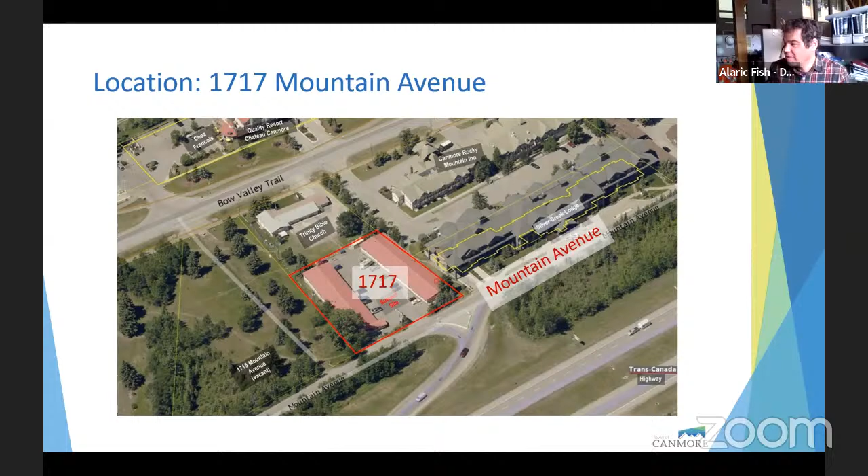So looking at the site from that access ramp, looking southwest, the existing building is partially obscured by the trees there, but you can also see it to the left. So that was the Akai Motel. It was a visitor accommodation and it's currently closed down. The existing building, while it complied with the use as visitor accommodation, it didn't meet the current density minimums and is subject for redevelopment here with this application.

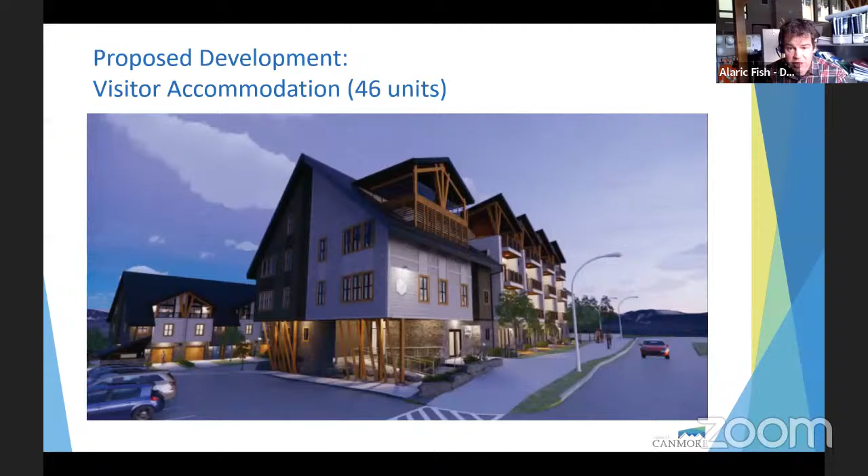So this is the applicant's rendering looking northwest from Mountain Avenue, in the general direction towards Banff, looking down the valley there. The development proposes 2 buildings with a total of 46 units of visitor accommodation. You can see the taller east building in the foreground of this image and the lower west building in the background, just behind the main access road. Also clear in this image is the new mixed-use pathway in front of the building, which provides significant new opportunities for pedestrians and cyclists in the area. This is important as there's currently no sidewalk in front of this property.

So this is a rendering from the other side, looking south from Mountain Avenue, showing the property as you would approach it from the north. This illustrates how the application largely conforms with the land use bylaw regulations.

The building form, materials, colors, and detailing all generally align with the community architectural and urban design standards. You can see the stone base, some articulation in the building, and the steeply pitched roofs. The 7-meter eave line is also achieved, and you can see how the top floors above that eave line step back, which helps reduce the massing as we view the building from the public realm.

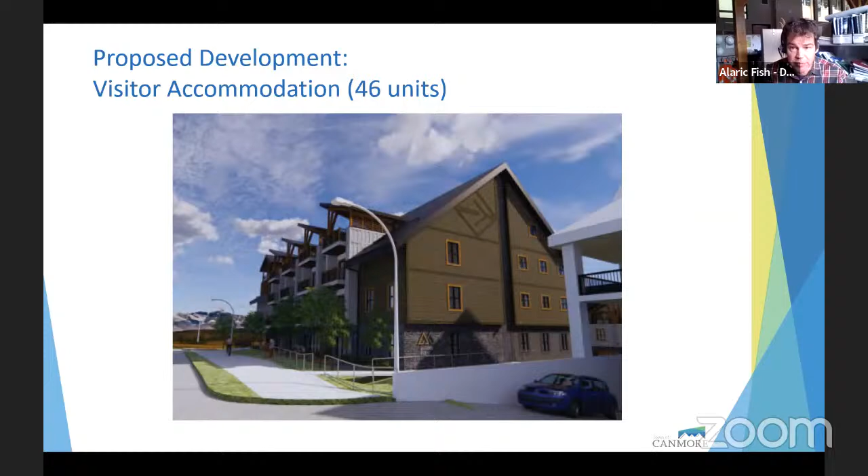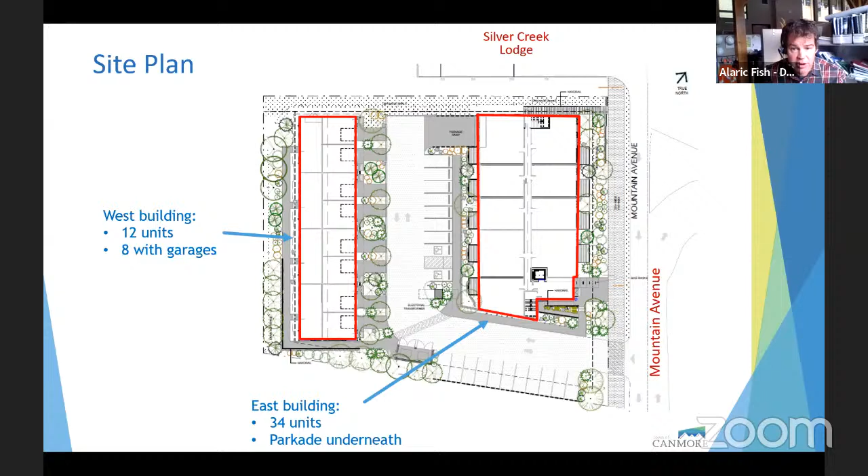Parking is provided in a variety of forms. You can see 20 surface stalls between the 2 buildings, and under the east building is a parkade with 18 stalls. On the west building, there are also 8 garage stalls. So the parking requirement has been met.

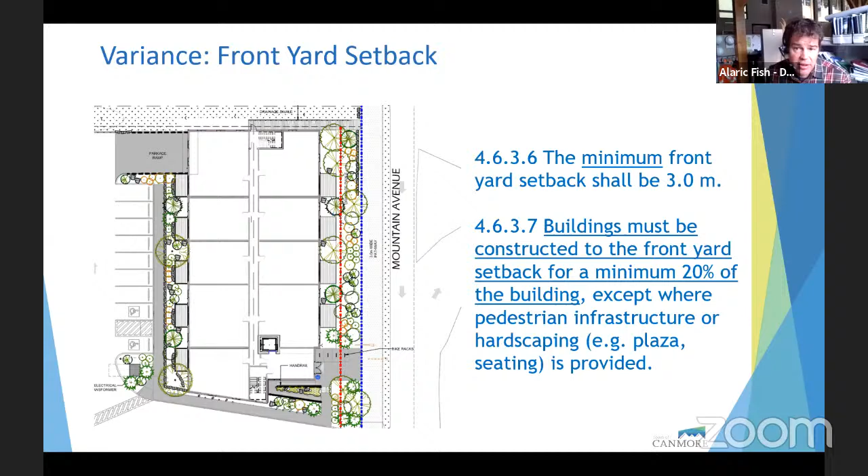I just wanted to point out that clause 114.16 establishes that as a condition for a variance, the development must meet the Town of Canmore enhanced green construction requirements. To meet this, the applicant has suggested they will achieve an improvement of 10% better than the National Energy Code of Canada for Buildings reference building. That commitment has been captured as one of the proposed conditions of approval, number 6, attached to the report. So the applicant has met that requirement.

There are a few other minor details that are proposed to be resolved through the conditions of approval.

The main condition is that a final plot plan reflecting the small changes in the building location be submitted prior to release of the development permit. An initial plot plan was submitted, but there were some small changes, so we just want to clarify that, though it doesn't change the intent of the application as presented.

Other fairly standard conditions include clarity on fire smart landscaping, requirements for visitor accommodation developments specifically intended to discourage illegal or unauthorized use of the property as a residence, and final details on the proposed lighting fixtures to be provided with the building permit application.

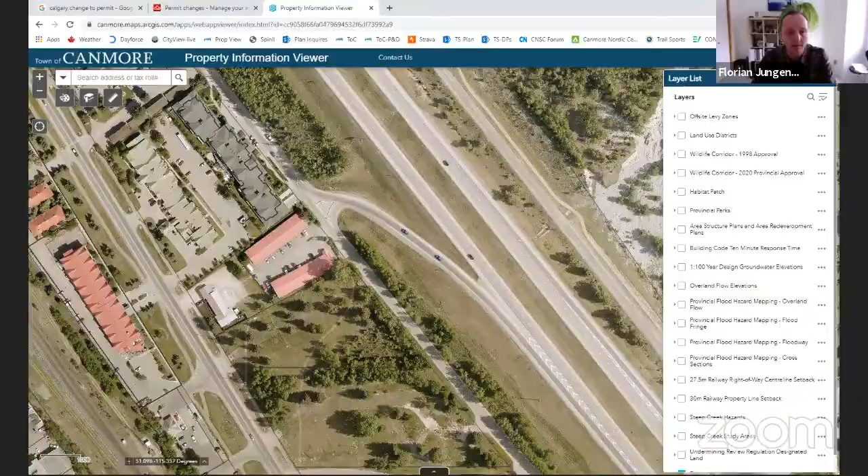Okay, thanks. I'm loath to bring up the parking issue again because we spent quite a bit of time on it last meeting, but I did give it some thought and actually wanted to repent and take back something I said last meeting. I think it's important, if we believe there's a climate emergency, which I do, and council has made that commitment, previous council, and the environmental impact of developments is something that comes up regularly from planning commission members.

So if we do believe there's a climate emergency, then we have to act accordingly. I think it's important that we, as members of the community and also as planning commission members, don't resist change. We talked about the parking requirements, the land use bylaw, and those are supported by the town's multimodal transportation plan, also the town's environmental plans to reduce greenhouse gas emissions. So I think it's important that we don't resist changes that move us forward in that direction.

So last meeting, I made some comments about the parking requirements not making sense from a certain perspective, and I just want to take that back. I think it's important that we do everything we can to move in a sustainable direction. Sometimes that's going to mean adjusting our habits, how we park and how we drive and how we get around town. I think it's important that we don't resist those changes.

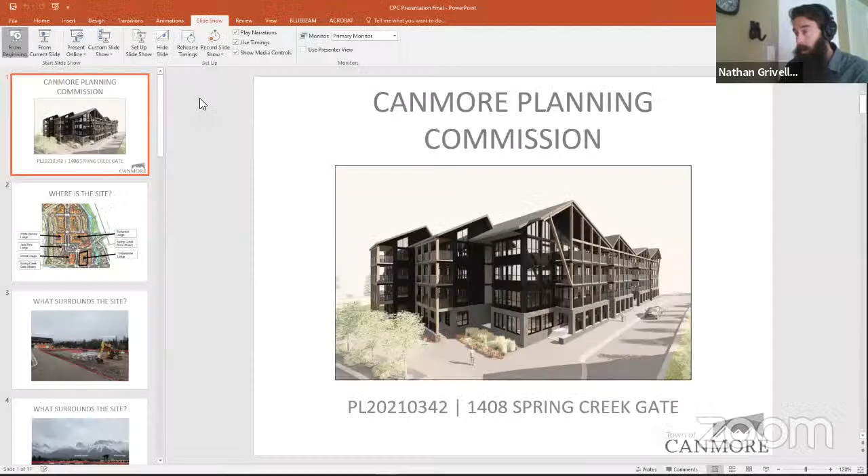Can everybody see that? Yes, great. Okay, good afternoon, members of the Canmore Planning Commission, as well as those watching online. My name is Nathan Grivell. I'm a development planner. My presentation today is in regards to development permit application PL 2021-0342, an application proposing mixed-use development at

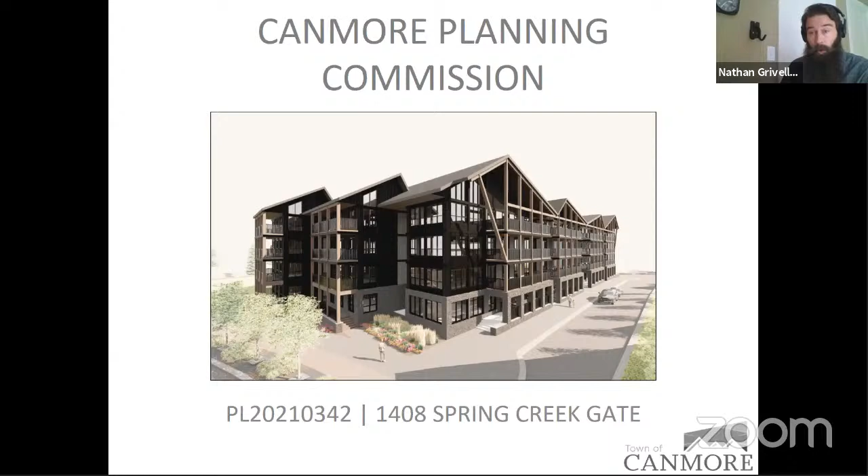1408 Spring Creek Gate, referred to as Timberstone Lodge. For those unfamiliar, Spring Creek is a residential area with support commercial south of Main Street, west of Bow Valley Trail, and it's framed by Spring Creek and Policeman's Creek. The black box on the screen shows the location of the subject site, which is in the heart of the village.

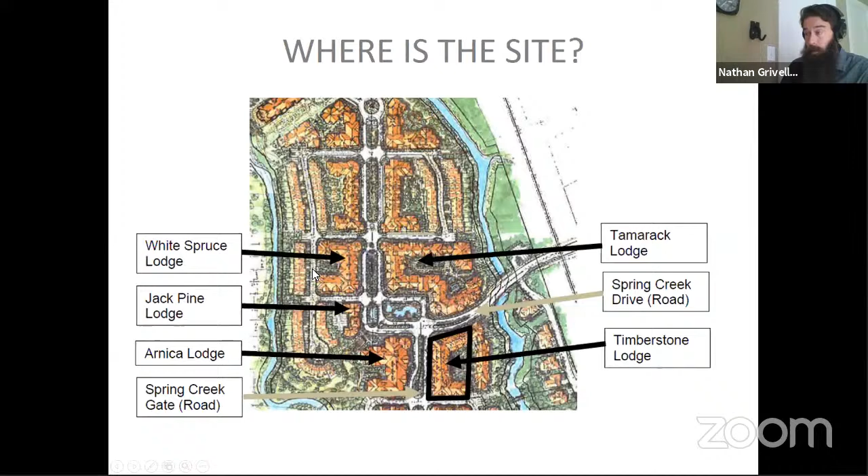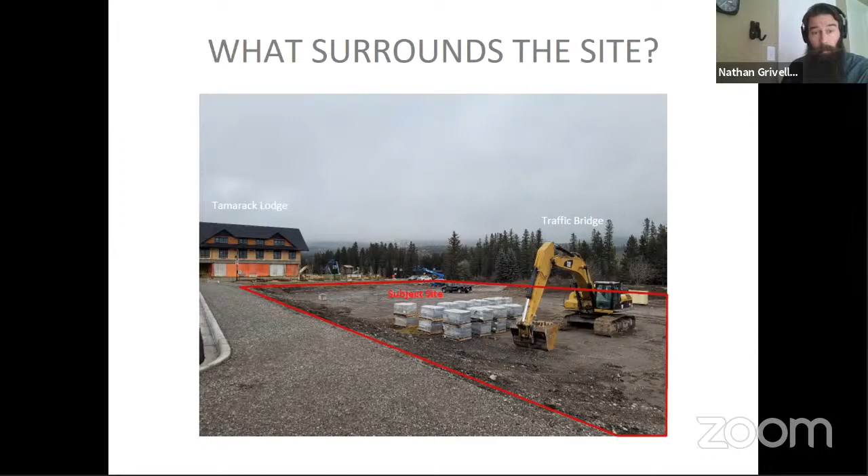The subject site is a brownfield site previously used as part of the mobile home park. The mobile homes have been removed from the site in preparation for future development. Adjacent to the site are a variety of uses and features, such as a mixed-use building known as Tamarack Lodge, currently under construction to the north, vacant land, and Policeman's Creek to the east. A mixed-use building known as Arnica Lodge, under construction as well to the west, and mobile homes to the south.

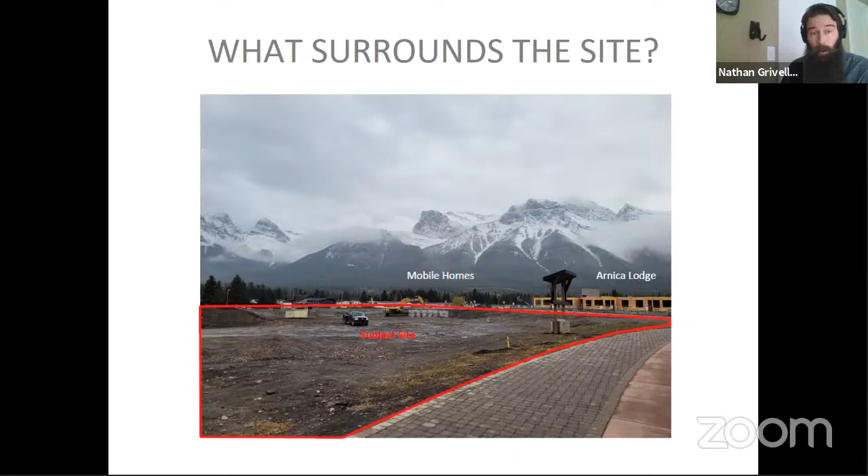The subject site is within and governed by the Spring Creek Mountain Village Area Redevelopment Plan. The ARP envisioned this site next to the future public plaza as part of the commercial focal point for the village. The development complies with this and all other requirements of the ARP.

The following uses are proposed with this application: 55 tourist home units and 1 live-work unit. These uses fit the intent of the district and the location of the site. With regards to form, there is 1 building being proposed, ranging from 3 to 4 stories with an interior courtyard.

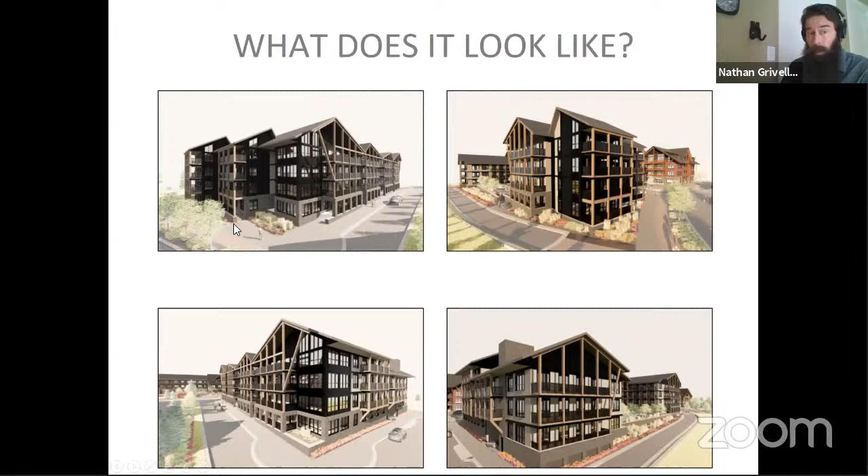Parking is accommodated by underground and street level parking. With regards to the ground floor layout, the ground floor is composed of tourist homes with a live-work studio on the corner adjacent to Spring Creek Drive and Spring Creek Gate. The blue arrow on the slide represents the entrance to the unit. The dark red arrow marks the common entrance to the building, and the 5 light red arrows mark individual entrances to tourist home units.

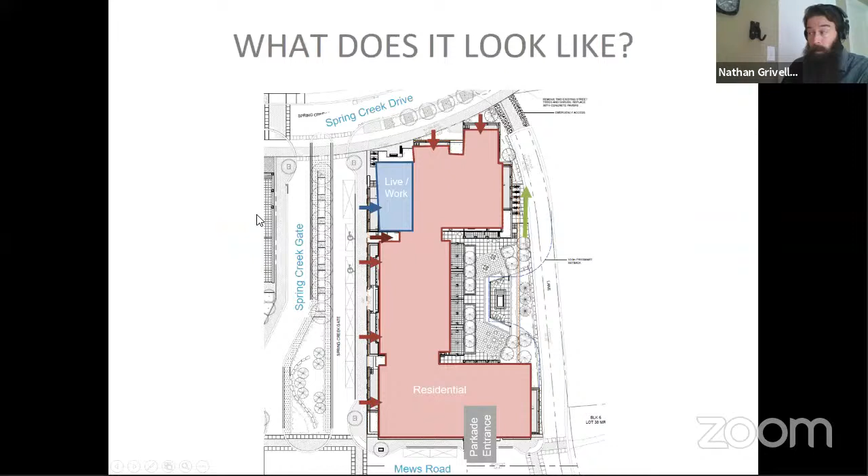The application requires 3 variances: variances to maximum building height, built to line setbacks, and open block space. I'll get into these a little bit more in a minute, but first I did want to highlight where the application exceeds the land use bylaw.

It exceeds the land use bylaw with respect to providing geo-exchange heating and cooling, achieving certified built green level gold, and achieving a minimum of 16% better than the requirements of the National Energy Code of Canada. These benefits are reflected in and quantified by the applicant's sustainability screening report. They have an SSR score of approximately 12, suggesting the proposed development will have a positive impact on the community.

Digging into the variances in more detail, the first variance is to building height. The development requires up to a 2.42 meter height variance in Zone A and up to a 2.48 meter height variance in Zone B. The size of the height variance is influenced by the parkade, which is set a little higher, pushing out of the ground for flood protection, driving the building a bit higher. The district does allow the development authority to grant variance to roof heights within the roof zones when the architectural integrity of the building would be enhanced. Some commission members will recall this was requested with Arnica Lodge and Tamarack Lodge.

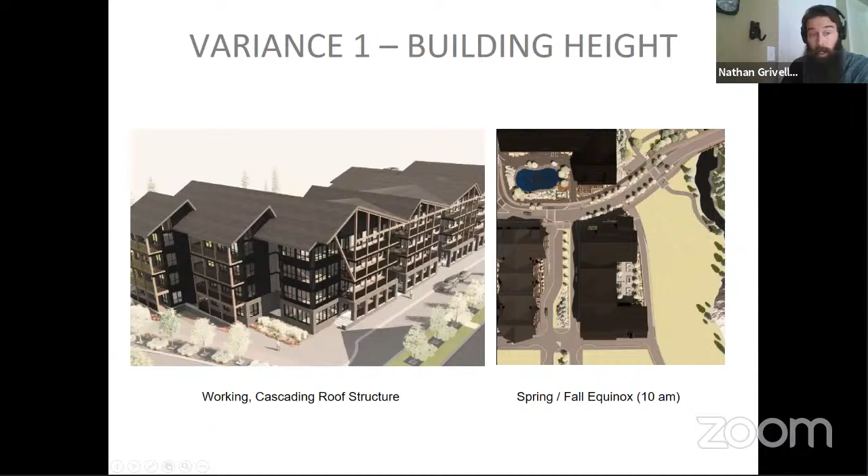Moving on to the second variance, the district also requires built-to line variations to break up the perceived mass of the building. The principal built-to line with allowable variations is: 40% to 75% of the main floor block frontage is required to be within 1.5 meters of the property line, trying to bring a majority of the building to the street and the sidewalk. A minimum of 25% of the building is to be set back between 1.5 and 3 meters, to allow for facade articulation and break up the mass at the street level. No part of the main floor frontage is supposed to be set back more than 3 meters from the property line.

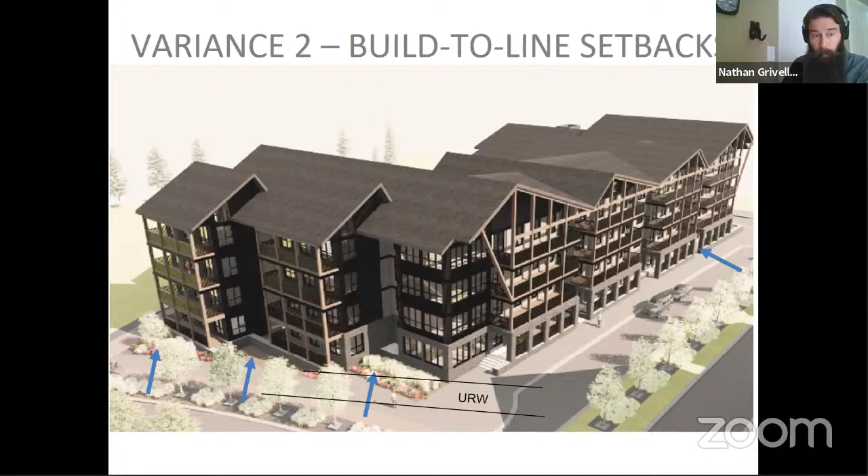Finally, the district also requires that 25% of the site be continuous, well-programmed and landscaped open block space. The applicants provided 21.9% in the form of a landscaped courtyard on the east side of the building, requiring a 3.1% variance. Administration supports the variance as the open block makes the best use of the shape of the parcel. The proposed additional space would effectively eliminate some of the ground floor units along that side of the building, so it's a bit of a trade-off. Those units do help increase the comfort of that space by adding more eyes to it - eyes on the street, as they say.

And secondly, although it's discontinuous with that open space, there's a bit of open space, a small plaza area on the north side of the building that complements the intent of the open block space requirement. That area and a little bit of landscaping along the north frontage amounts to about 3.4%, giving a total open space provision of 25.3%.

So they're essentially meeting the area requirements and meeting the intent through the design that they've proposed. It's also worth mentioning that there is the plaza across the street, which will be the primary amenity space for social interaction in the village, especially for buildings right adjacent to it. So a lot of the residents of this building will probably just head over there to use that amenity space.

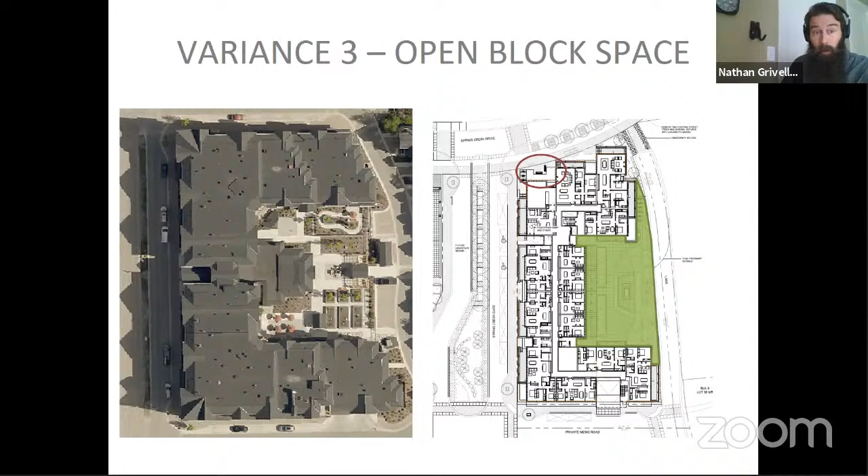A notice of application was posted on the site for 10 days, listing all the variances. No comments from the public were received.

So given the alignment with the ARP and the economic and environmental benefits of this development, administration recommends that the Canmore Planning Commission approve PL 2021-0342.

Should the Commission decide to approve the development, conditions of approval have been prepared. These can be altered at the discretion of the Commission. However, it's not recommended that the Commission tinker with the standard conditions section, as these are generally in response to council-approved documents and so forth. And with that, that concludes my presentation. I'm happy to take any questions the Commission has.

Thanks very much, Nathan. So I'll open it up to the floor or to the board for questions for Nathan. We'll start in reverse order. How about you, Doug?

I've got no questions for Nathan on this one. He's explained the three variances. And as he mentioned in his presentation, a couple of the variances are similar to what we've seen in prior building developments within Spring Creek. So for consistency, it does make sense that we approve these.

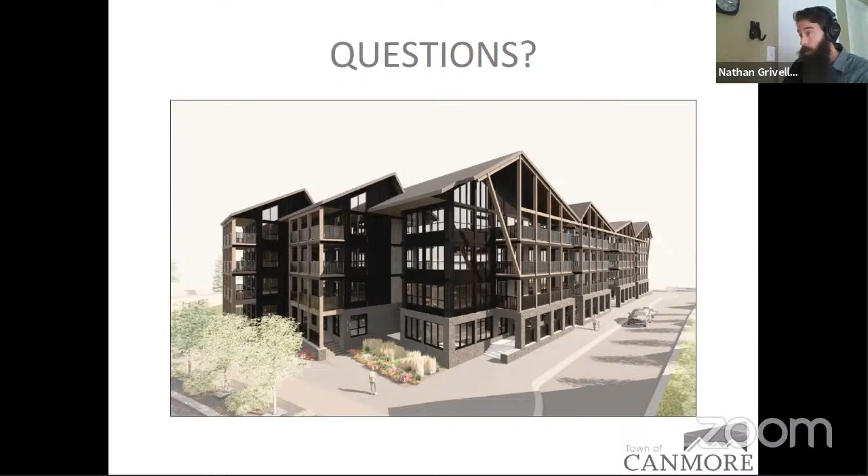I would defer that question to Spring Creek, the applicant, if one of their team members would like to respond to that. Frank here, if you don't mind if I respond. Sure, go ahead. That'd be great, Frank.

Thanks, guys. First, Tamarack, the building across the street, we are installing solar panels on that. It wasn't part of our application to Planning Commission a couple years ago, but for all our buildings we've been trying to make them at least solar ready. To do that, you need to get at least conduits up to the roof, and you have to make sure structurally your roofs can support the solar panels and the snow loads and everything with them.

It's quite cost effective to get a building solar ready, though it's quite costly to install the panels. We are doing it on Tamarack and plan to do it on Arica. This building we are designing to also be solar ready, and it ends up being, at the end of the day, a budget question.

We had a 30% cost of construction increase in the last couple of years, but we did find it in the budget for Tamarack, and we're hoping to continue that on our future buildings. Using geothermal with solar is probably the best combination to get to net zero, besides doing more building envelope improvements.

We said 16% on that, but maybe Drew can speak to our previous buildings. We're usually hitting at least 25 to 35 percent energy efficiency over the base building, but we put in a conservative number to make sure we exceed goals rather than underachieve them. Drew, my planner, might answer that a little more since he handles the energy reports we submit to the town.